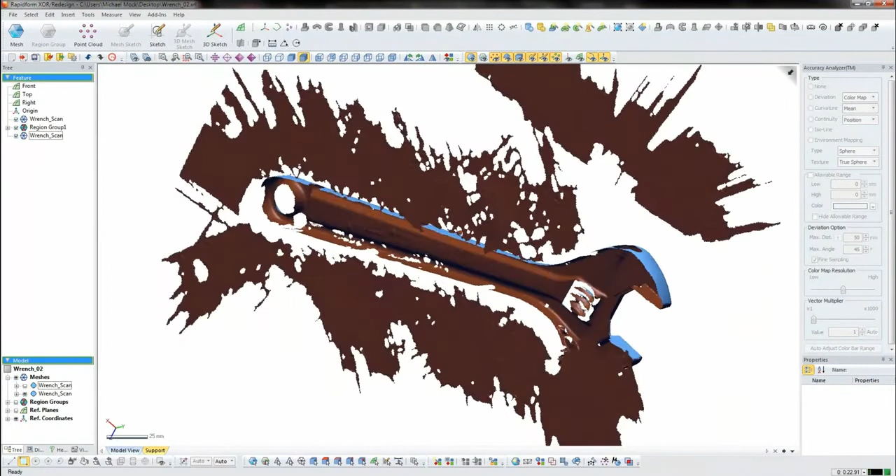So, as you can see, we've got the scan here, and we only scanned half of the part. And we also didn't get very much information in the thumb screw, and there's areas that are hidden inside of the part. These are traditional limitations to any kind of measurement process.

If you can't reach or touch the area you want to measure, it's going to be very hard to come up with the information for that.

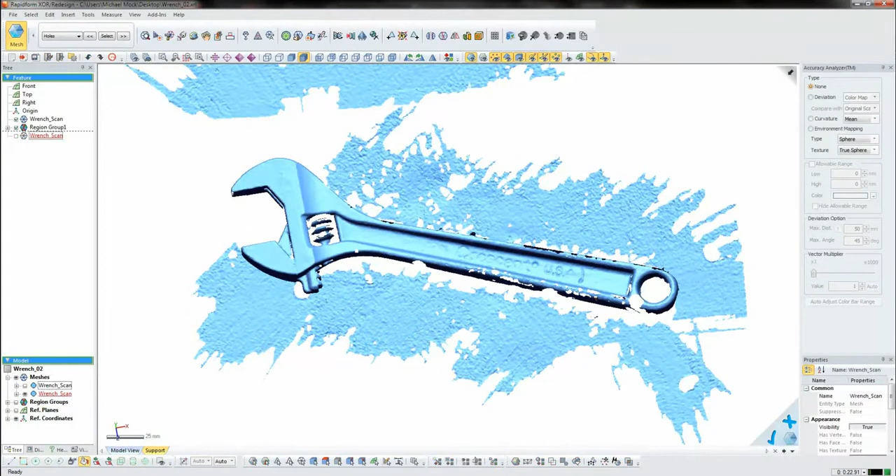So the first thing that we'll do is remove a lot of this extraneous information, such as the table that it was being scanned on. Getting rid of the extra information is very easy. I can just pick out the areas that I want to keep, and I can easily remove all the rest of the information.

Once I have this piece here, the next thing we'll do is we'll break the scan data up into some different areas based on changes in curvature. And so you can see the different colors applied to the object now. This lets us understand a little bit more about what's happening with the part.

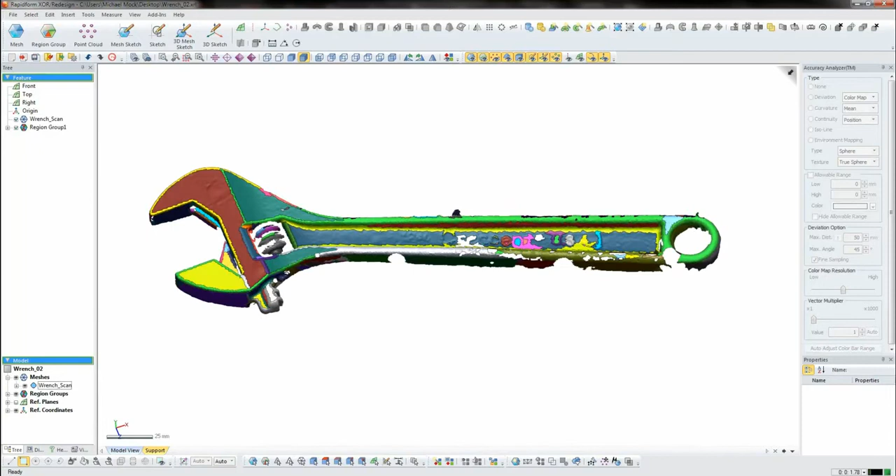And I'm going to use the scan data to help me build a section that I can draw against. So you can see this blue outline here shows me the outline of the information that we've captured. And I'm going to use that to help me build my model.

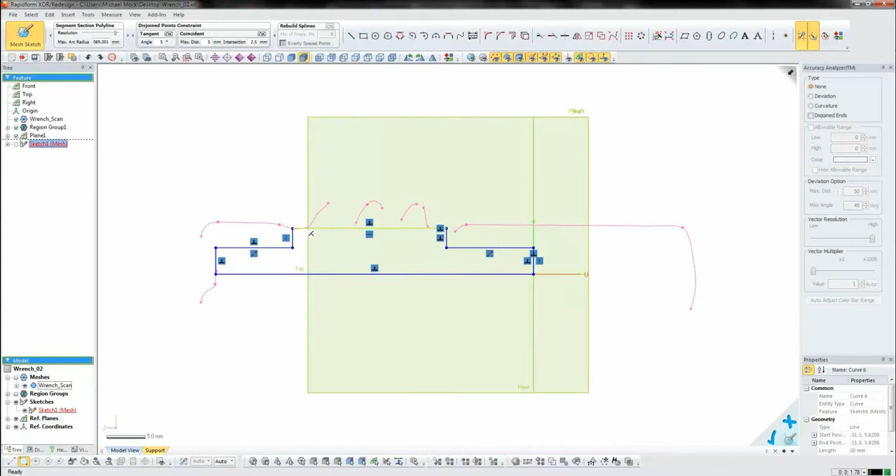So I can very easily draw up what this thumb wheel should look like, complete with tolerances and clearance. You can see that that's going to clear both sides. It extends to the scan data there. And where it terminates in the part is more or less a guess, but I don't have to be very specific at this point.

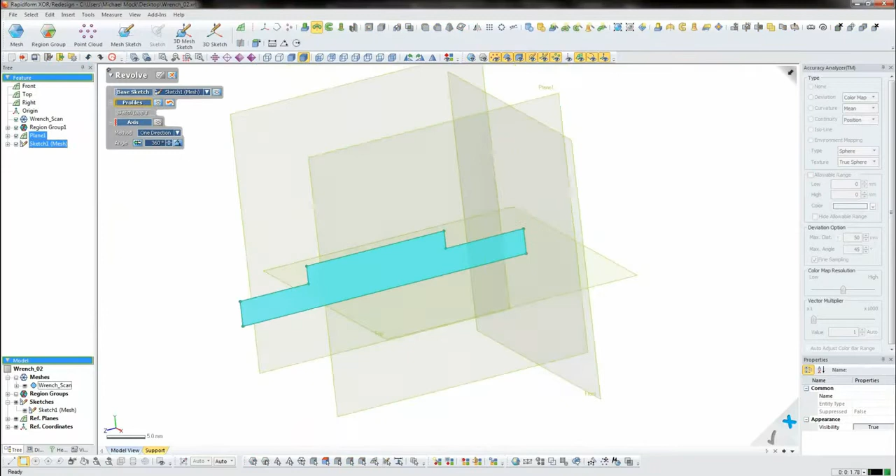Once I have that information, we're just going to do a revolve and create the base shape of the thumb wheel.

So now I have this thumb wheel, and I'm going to build a helix on which I'm going to build the rest of the part.

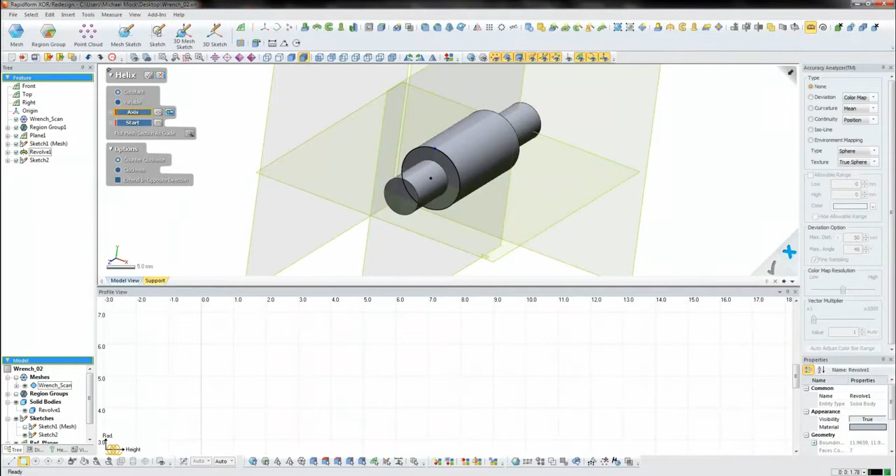So with the Smart Helix tool, we're going to use the vector and a starting point, and you can see it builds a helix here for us.

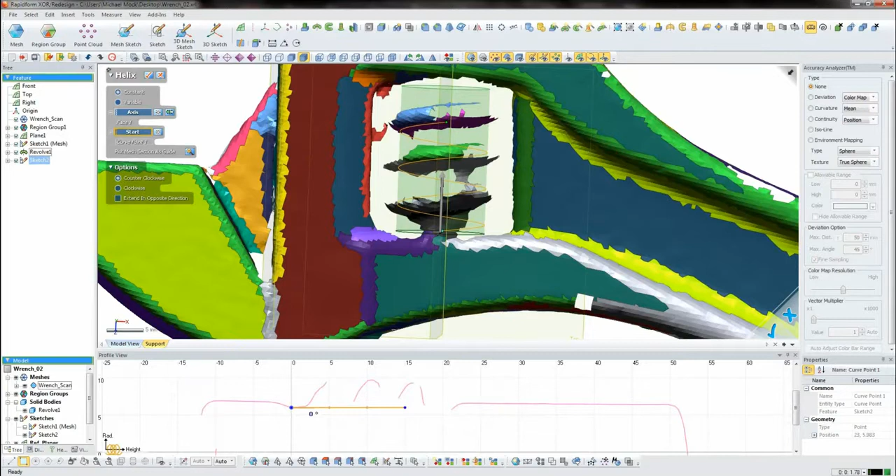And as I turn the scan data back on, I can start to see whether or not I'm matching the scan data or not. I can also plot the scan itself and see how closely I'm matching. And now I have a profile for this shape.

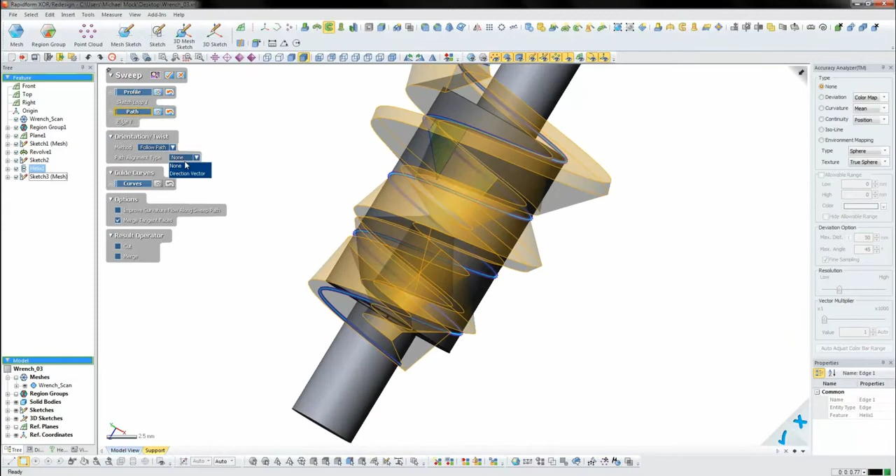So now I'm going to do a solid sweep operation to take that profile along that path. Now we see we have some twisting going on, so I'm going to define that it can't twist in a certain direction so that I get a perfect profile.

And as I turn on the scan, you can see that I'm matching very closely to the original thumb screw, which may not have been perfect either. It may have been cast and then just highly polished.

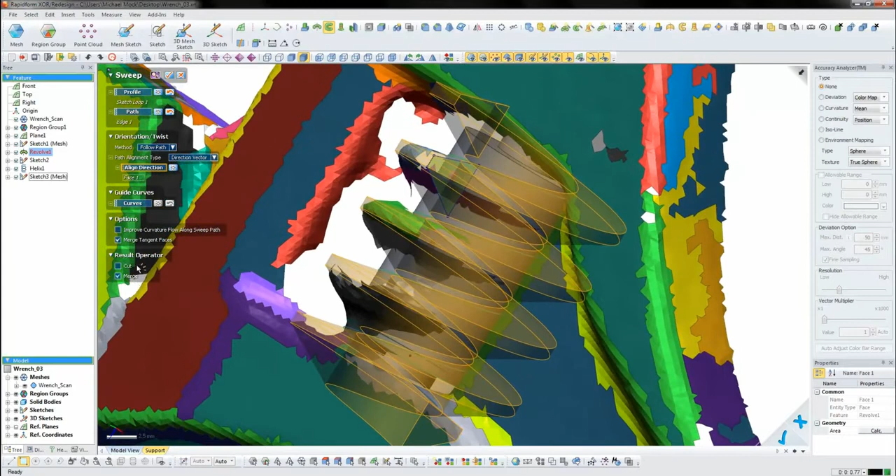So I'm going to go ahead and add this information, and I'll have built one complete thumb screw.

Now I just want to add a few more design points, such as adding in a fillet to round off the shape so that I don't have sharp edges on my part.

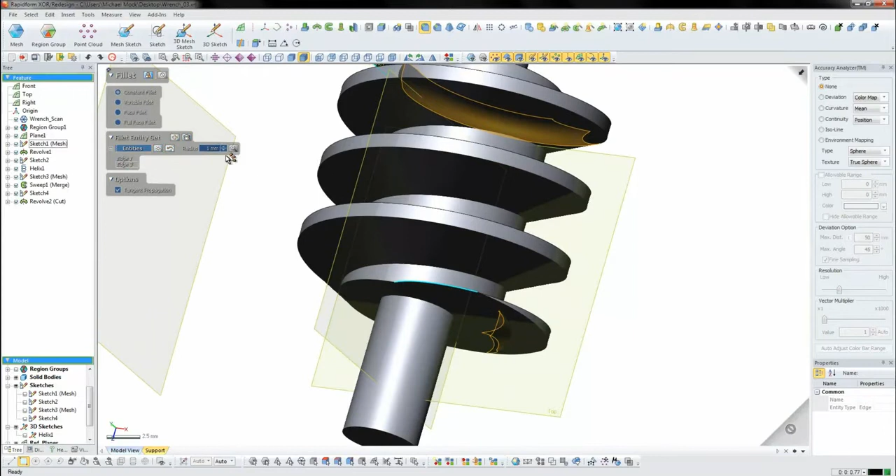So now I can see that I've got a very good thumb screw that matches the original wrench quite well.

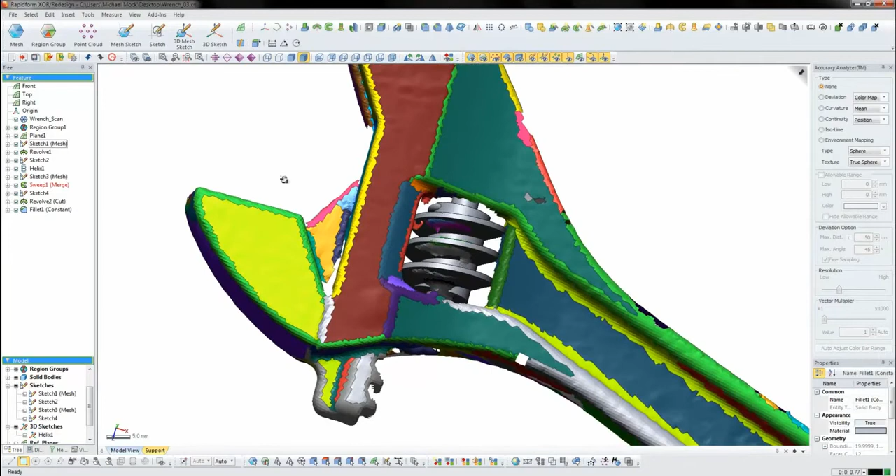So I'm going to use this, and now I'm going to move on to the claw portion over here. Using the same process of taking a sketch based on the section of the scan, I'm actually going to take the total shadow of the part.

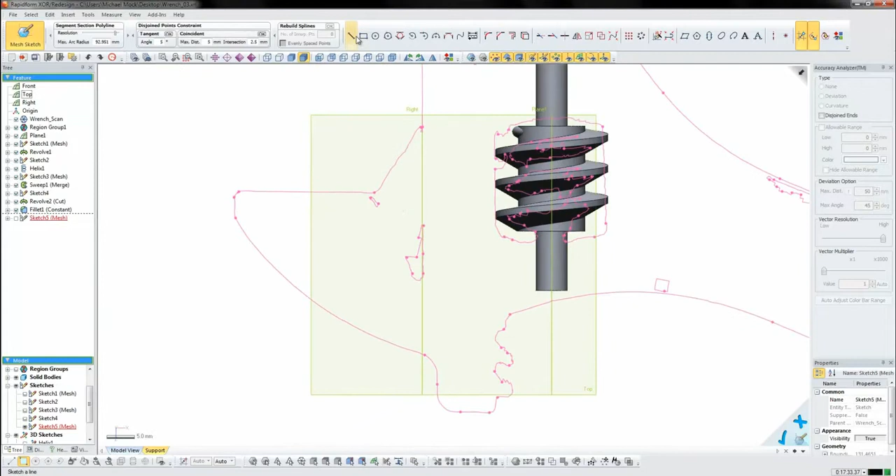And this is going to help me build this claw shape very easily. So again, you can see that I can very easily snap to the scan data points themselves, building the information that I need.

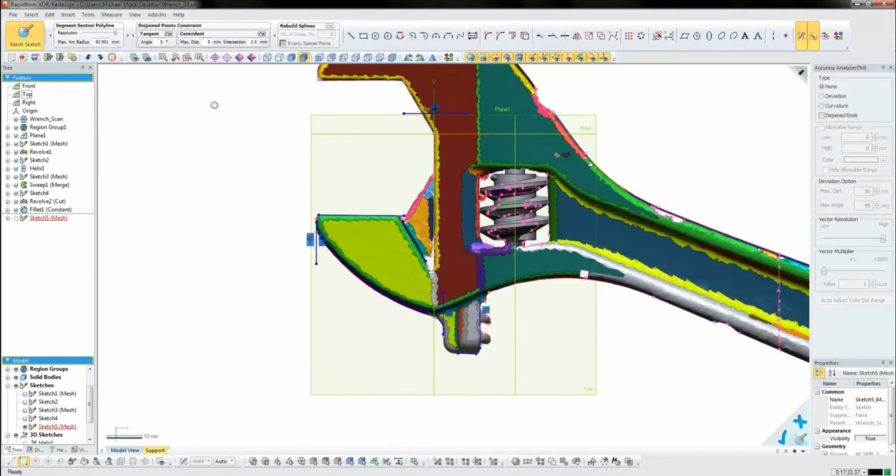I'm not entirely sure where the part stops inside the wrench, so I'm just going to make an assumption that it should stop somewhere near the top there.

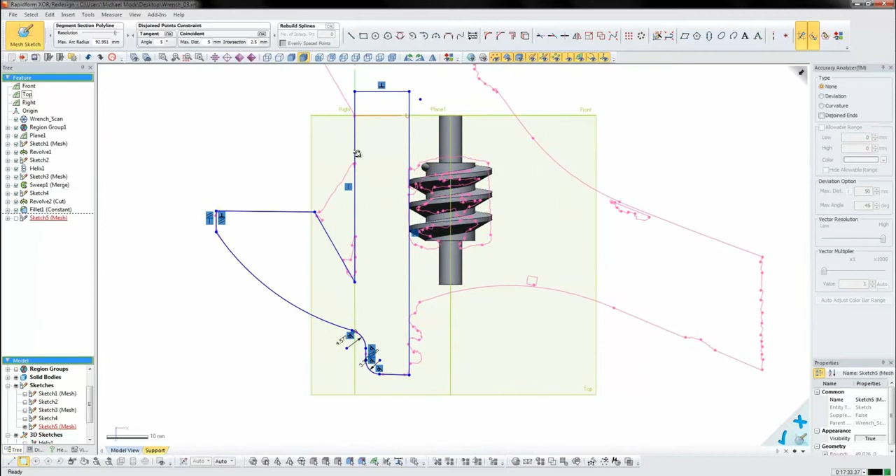Anyone familiar with CAD and design and drafting should realize this is very similar to the process you'd use to design a component. We typically call this reverse engineering or reverse design, where you're extracting the design intent from the part itself instead of just duplicating the original shape.

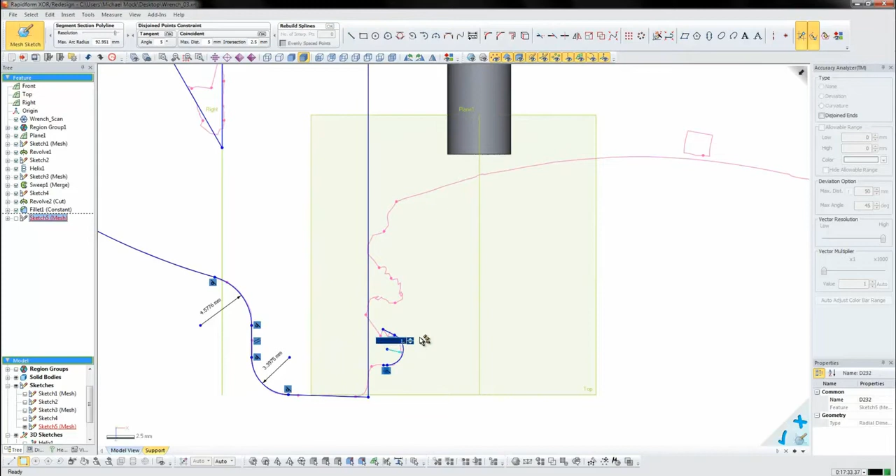So here I need to build this shape, and I want to add a fillet, and I can modify the value of this fillet. Maybe it's 1.2 — that looks very close to what I'm looking for.

We can start to measure some of the angles here. If I measure that angle, I'll make it also 40 degrees to match the thumb screw. And I'm going to extend these pieces.

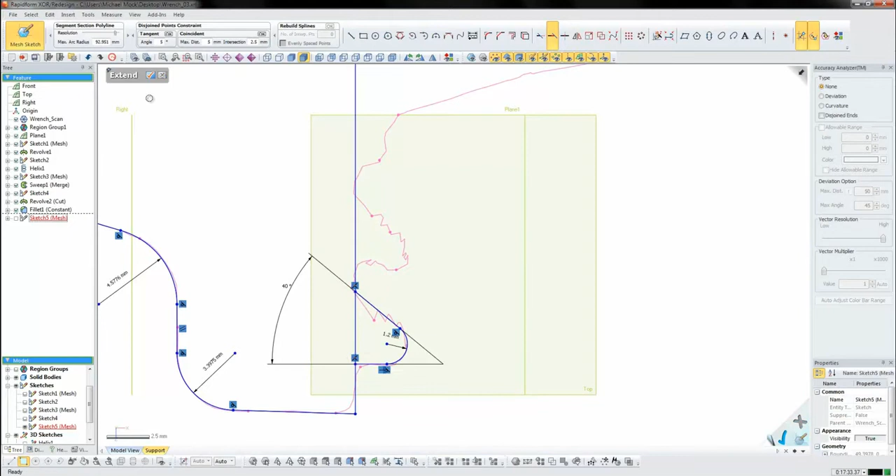Now I just need to pattern these up and down this claw shape so that they'll engage with the thumb screw itself. So I'm going to do a linear pattern of that shape.

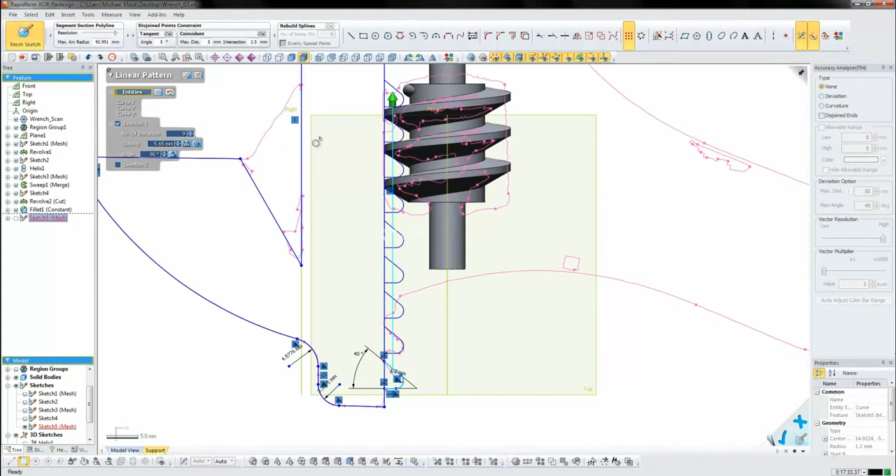I'll just turn it. Remember, I set the pitch of the thumb screw to 5.65 millimeters. So if I type in that value for the spacing, I get a perfect pattern that goes right through all the gear teeth. I'm going to go ahead and accept that.

And I know that up here, the part changes a little bit, and it just goes to a straight edge. So I'm going to go ahead and make that design change.

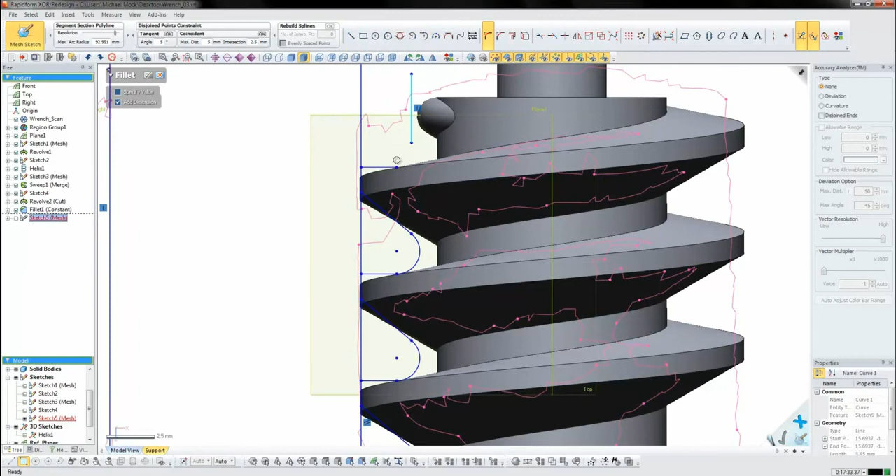And I'm going to add a fillet here with some additional clearance. So we can very easily come up with a complete profile and remove all the extra information that we don't need.

You can see we have a large number of constraints on all of this, but this also preserves our design intent through the entire process.

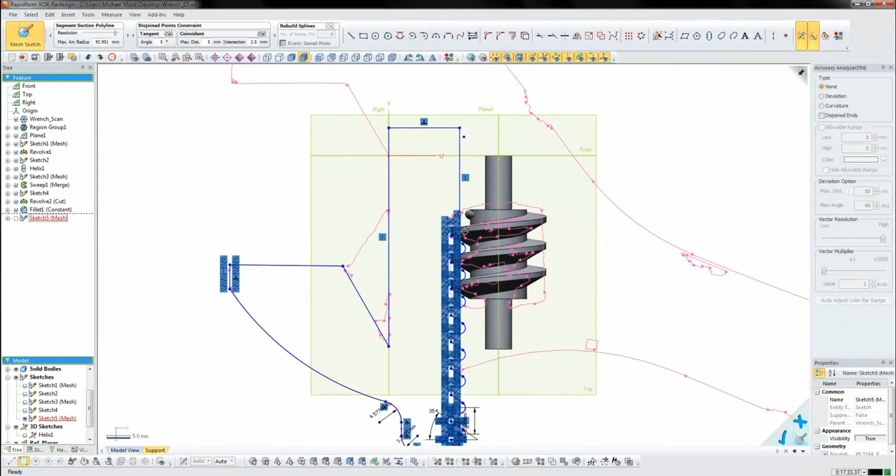So we'll go ahead and take that information and extrude it in both directions, and we'll remove the excess material.

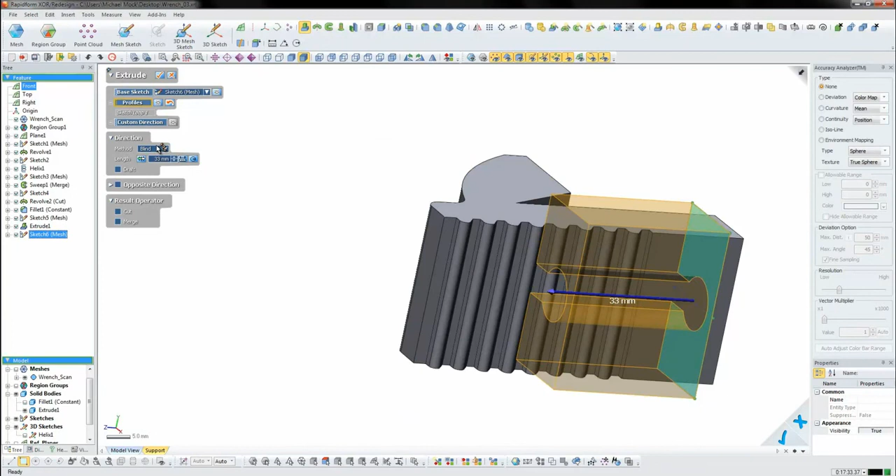Now I have a shape that I can extrude and remove material from the large block that I've made. Now I just need to find the shape for this area.

Now I have the same shape that I can use to cut on both sides of the part. So we'll cut through all and we'll get a result like this. Now I can see the claw is mostly done.

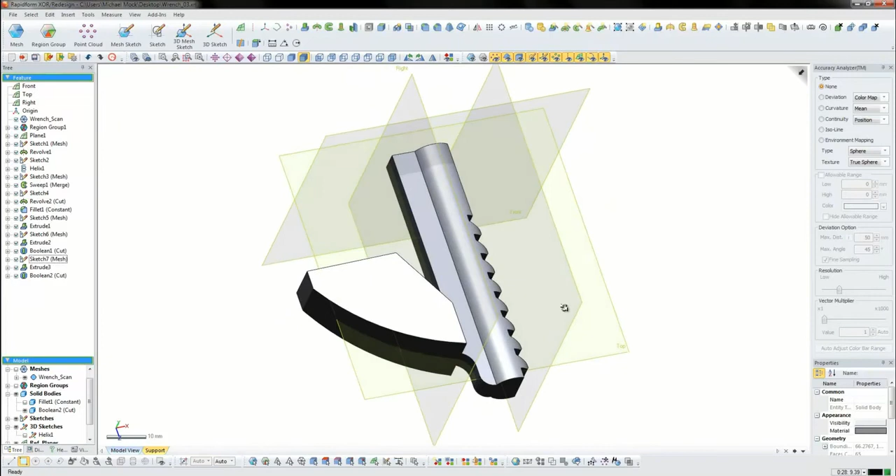I only need to make one additional change, which is adding in this area. So I'll once again do a mesh sketch with the outline of the part, and fit right to the scan to help me build this shape.

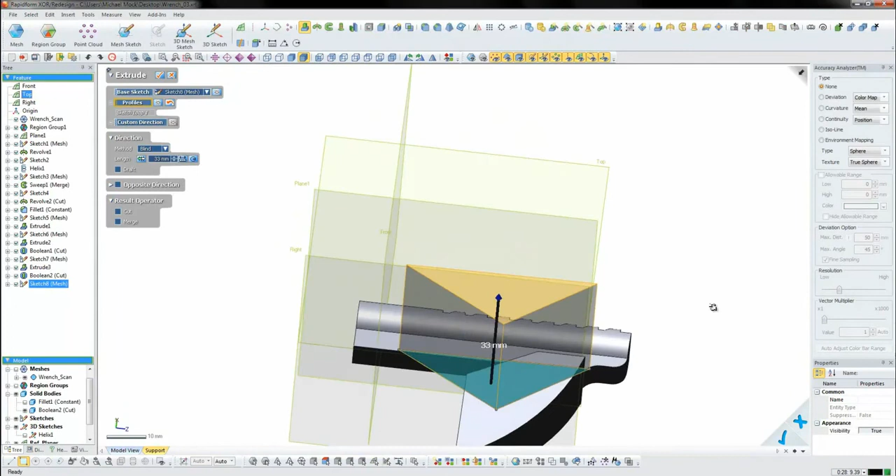And then I'll extrude this. As I get close to the correct length, it snaps onto that area of the scan data and tells me what the value should be. So I'll go ahead and extrude and merge that together.

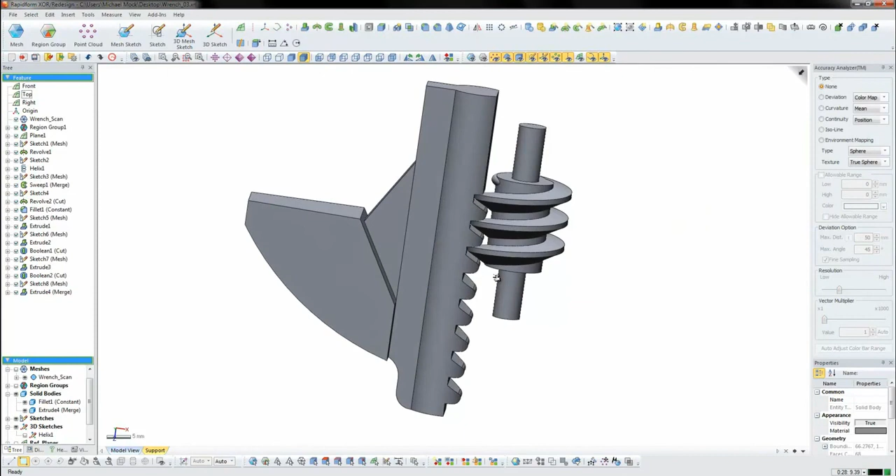So now I have two of the three components finished, and these are the components that have to actually interact with each other.

Now I'm going to concentrate on the main handle of the wrench, and I'm going to continue the same process that we've seen already. I'm going to go ahead and extrude this, much like before.

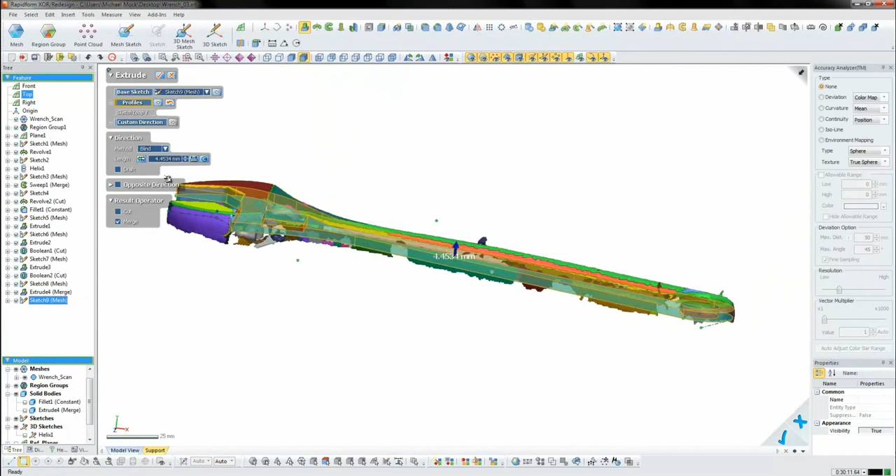In both directions. And then my next step will be to find the profile that takes up the entire outside shape. So here I have the outside shape, and again, move on to cutting the part.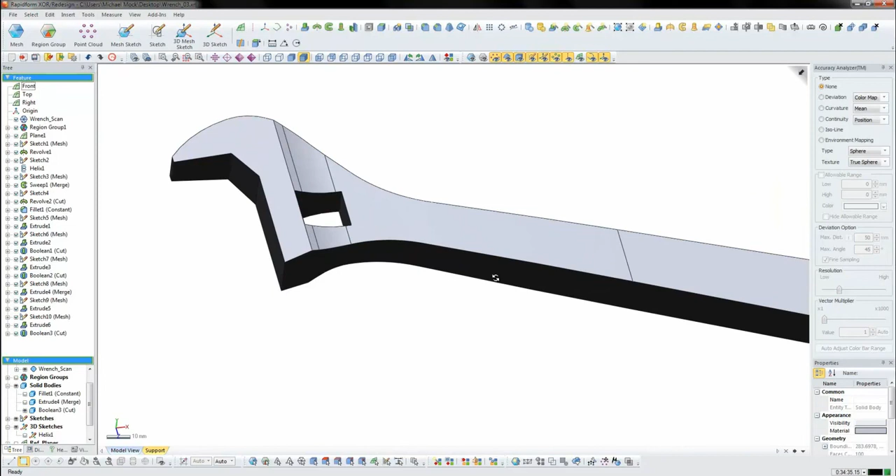Now I have the majority of the wrench shape complete. We only have a few details left before we can make a functional model.

So I'm going to go ahead and cut out some of the information for the claw and the thumb wheel, and you see I get this cut information that cuts away all the extraneous information and gives me the correct profile.

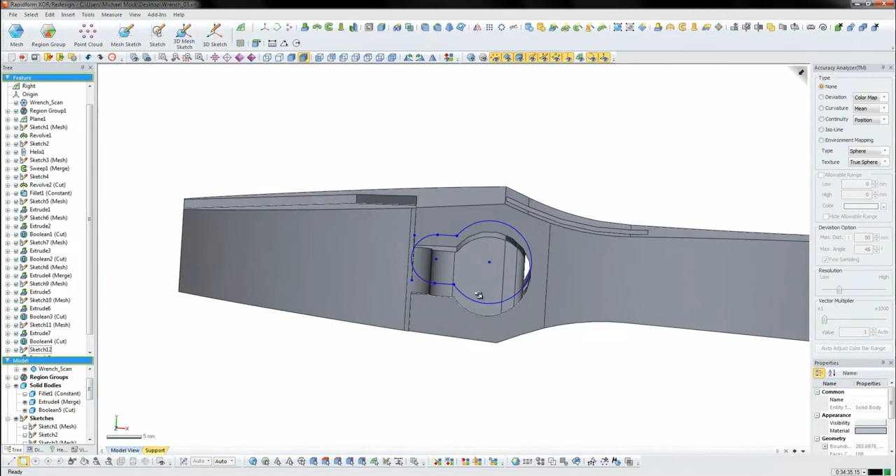Again, comparing with the claw that we've already designed, we have plenty of clearances, fit, and function. The only things left now are some additional detailing, as well as some fillets and other things.

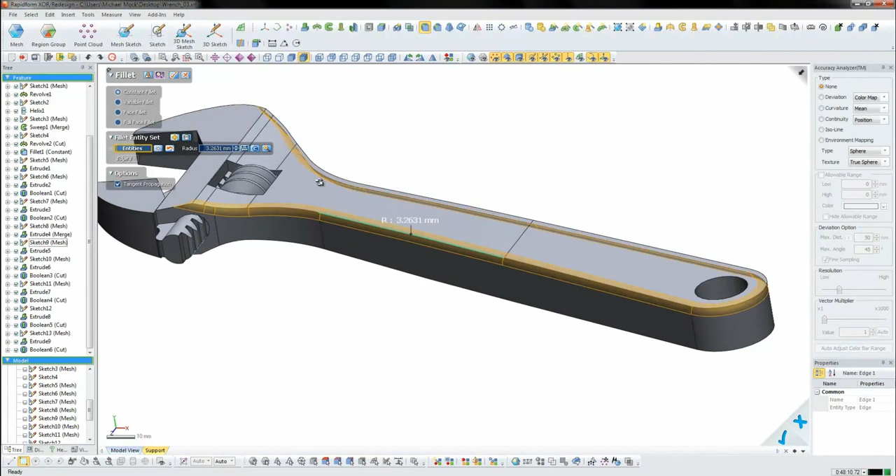As I add some fillets to the part, we can easily measure the radius from the scan data and add that information. We can also apply a radius to the inside of the hole, finding it to be a little bit smaller.

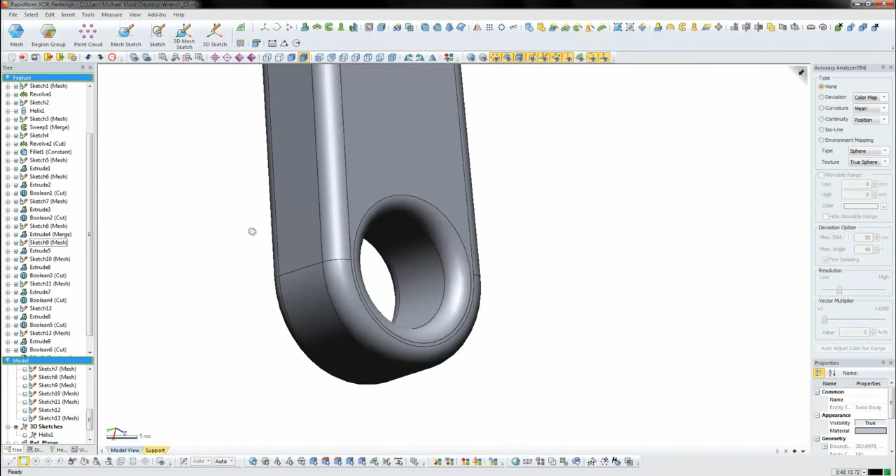Some of the additional features we need to do are cut out a pocket here to reduce the amount of material we're going to use, or we could choose not to.

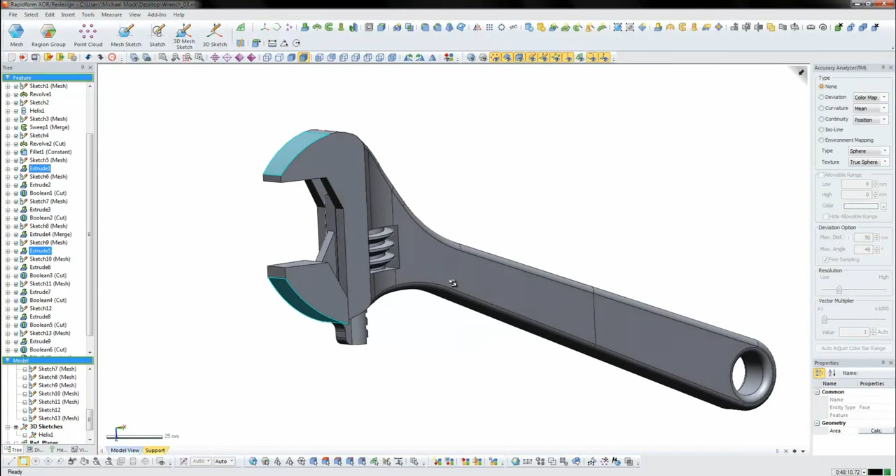The original part had rounded features for these two areas, and we can add those rounds there. Otherwise, the part would then be ready to go to printing and ready for actual functional use.